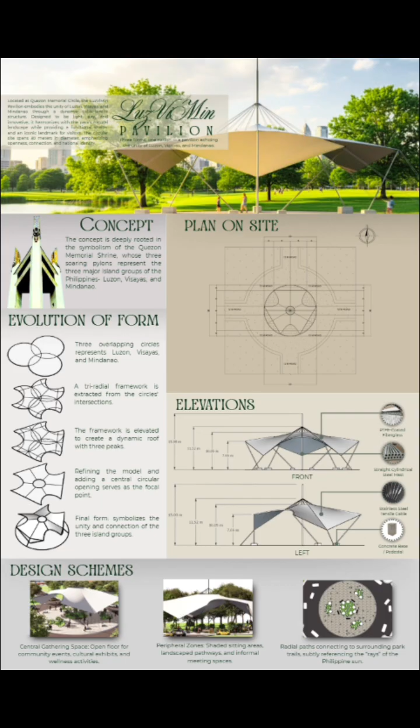So the LuzViMin comes from the three major island groups of the Philippines, which are Luzon, Visayas, and Mindanao. This pavilion embodies their unity through an expressive, lightweight, and tensile structure.

The project is situated at Quezon Memorial Circle, which holds deep national symbolism. We wanted to design a structure that not only complements the beauty of the park but also represents harmony and identity. The LuzViMin Pavilion spans about 30 meters in diameter, forming a perfect circle that conveys inclusiveness and connections.

The form itself represents openness, an architectural gesture that welcomes people from all directions, regardless of where they came from. Through this design, our group aimed to create more than just a structure. We envision a space that serves as both functional shelter and iconic landmark. It represents a pavilion of unity where people can gather, interact, and celebrate the collective identity of the Filipino nation.

The main concept of the LuzViMin Pavilion is heavily and deeply inspired by the Quezon Memorial Shrine, which features the three soaring pylons representing the three major islands of the Philippines: Luzon, Visayas, and Mindanao. We wanted to reinterpret the same symbolism in a lighter and more modern way by translating the idea of unity in diversity into an architectural form.

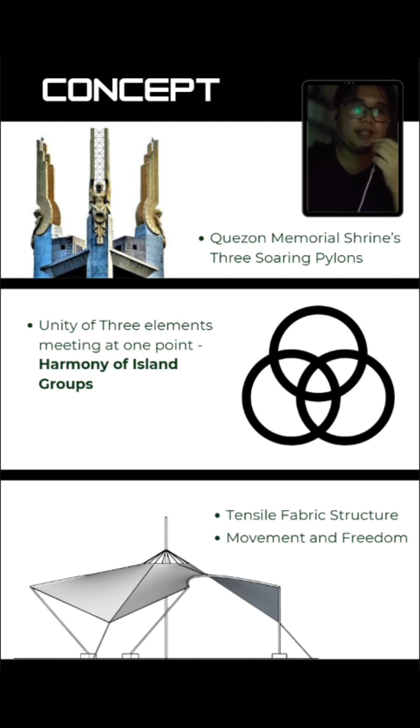The form of the pavilion evolved through a simple yet meaningful design process. We started with three overlapping circles, each one representing Luzon, Visayas, and Mindanao. These circles symbolized individual identities that come together to form one cohesive whole. From the intersections of these circles, we derived a triradial framework, which became the structural basis of our design. This framework creates a sense of balance and equality among the three regions.

Next, we elevated the framework vertically, generating three peaks to establish a dynamic roof form. These peaks are symbolic of the three island groups rising together in unity. To refine the model, we introduced a central circular opening, which serves as a focal point and allows natural light to enter the pavilion. This detail adds a sense of openness and connection to nature.

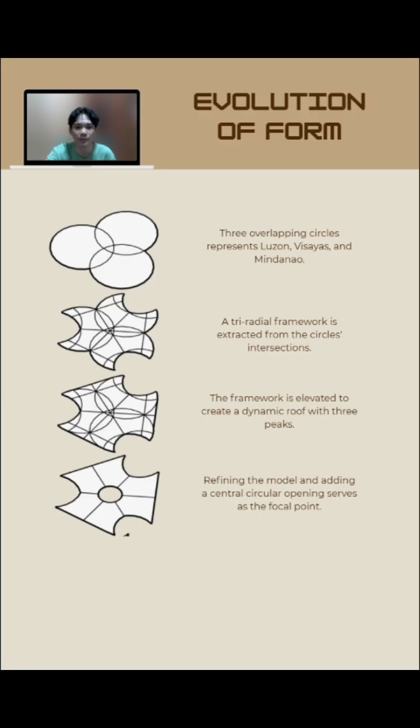The final form, with its flowing curves and central convergence, symbolizes the interconnection and harmony of the Philippine Islands, transforming symbolic geometry into a living architectural form.

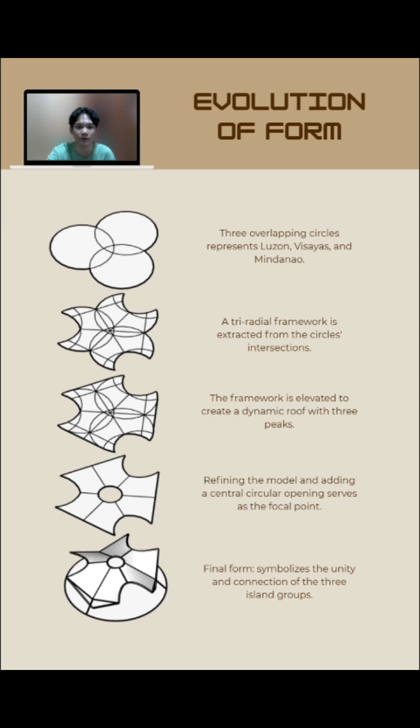The pavilion sits at the center of a 30-meter circular site in Quezon Memorial Circle. We placed it right in the middle to keep it open, balanced, and welcoming from all sides. From the center, three equal radial paths extend outward, representing Luzon, Visayas, and Mindanao coming together. These paths work both as circulation and a symbol of unity.

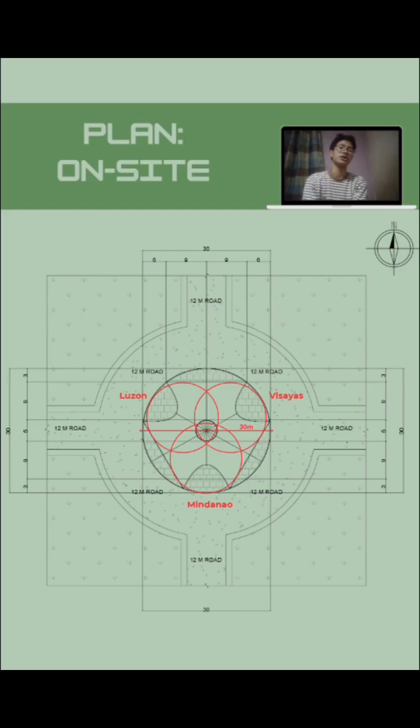Around the pavilion, landscape areas and open lawns create space for movement, rest, and interaction. The circular layout keeps everything accessible from any direction, showing how all regions stay connected to one shared center.

The LuzViMin Pavilion was designed not just as a monument but as a functional and inclusive public space. At the center, the pavilion provides an open gathering area intended for cultural exhibits, performances, community programs, and wellness activities. This open layout allows flexible use depending on the occasion, from small gatherings to larger civic events.

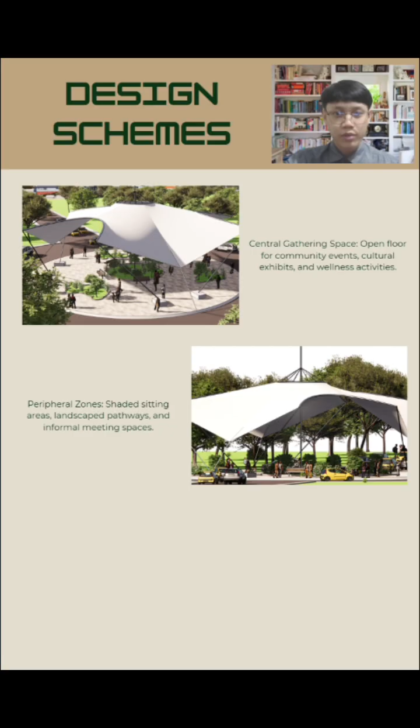Surrounding the central zone are peripheral shaded areas that provide informal seating, landscape walkways, and resting spaces. This allows visitors to enjoy the pavilion comfortably while still engaging with the surrounding park environment.

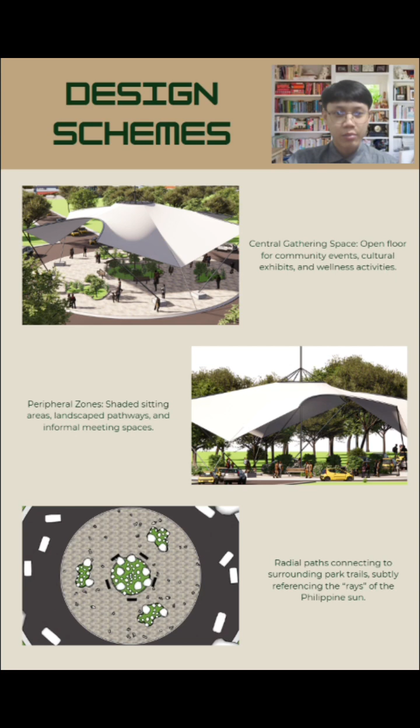The radial paths extending from the pavilion connect seamlessly to existing park trails, visually forming the rays of the sun, a symbolic reference to the Philippine flag and the idea of radiating unity. Overall, the design scheme promotes interaction, movement, and cultural connection. It's a place where people from different walks of life can gather, reflect, and celebrate the shared identity of being Filipino. The LuzViMin Pavilion ultimately stands as an architectural embodiment of unity, community, and national pride.

Elevations. The pavilion's elevations highlight its elegant, lightweight, and modern structural character. The overall height reaches up to 15 meters, creating a striking yet graceful silhouette against the park's skyline.

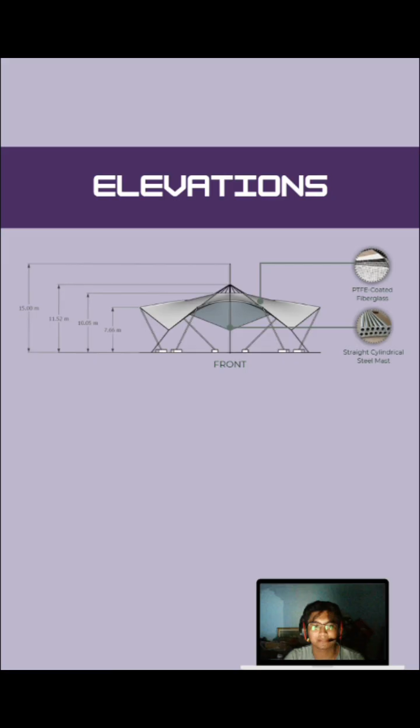The roof's three soaring peaks symbolize the three major island groups, while the sweeping fabric surfaces create a continuous and fluid form. For materials, the roof covering is made of PTFE coated fiberglass, chosen for its high tensile strength, durability, and ability to transmit soft natural light.